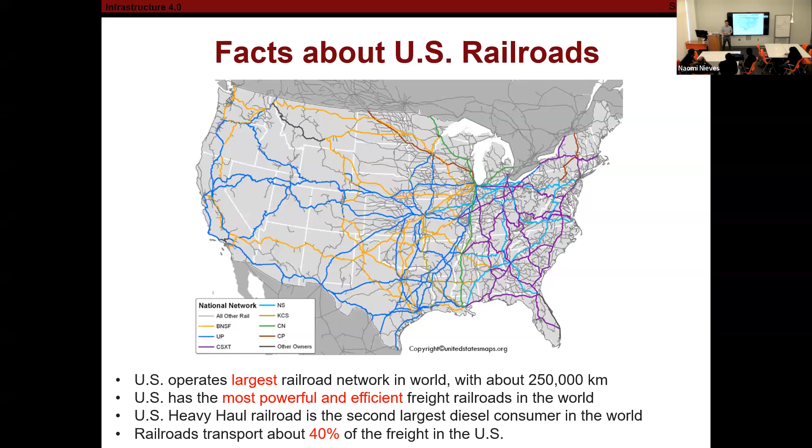So a little bit of basics. What is track? In your mind, probably the first image you have is this—yes, we are close to the stadium, of course. So what is track? A track is a guided way. It's guided—you cannot cross to a different way, you have to stay on your track. Similarly, we have the railroad track. It's a guided way; we do not maneuver the direction, the only way to control is the speed along the track.

In case you missed the news, there was an accident in Ohio in February. This is the kind of attention we have to give to the railroad—it's actually related with our life, very important, related with safety, efficiency, and transportation costs. So it's an important system; we have to inspect it and make sure it can operate safely.

So we have to do a lot of regular inspections. FRA actually requires each track segment to be inspected at least twice every week—very frequent compared with the size of the network. A lot of traditional ways: we use rulers to measure the gauge, check whether the bolts are well maintained, sometimes check switch points and crossings, and we also have hand push cars to measure different components of the track.

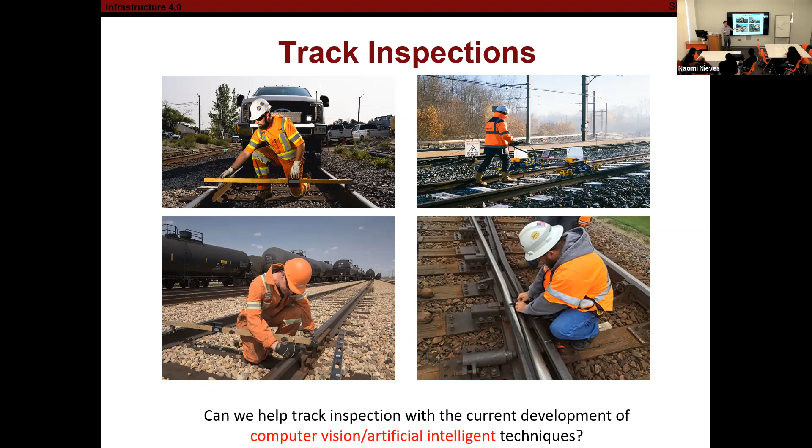Another hot technology recently is computer vision, which you've probably already heard about since you guys are working on autonomous vehicles. We want to make this technology work for different disciplines, so why not make it work for railroad inspections?

Would that be helpful or not?

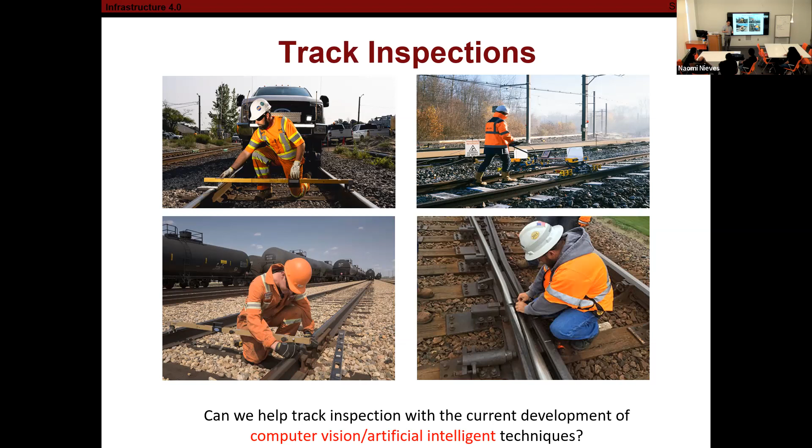What is the definition of computer vision? You may have your own definition, but according to Wikipedia, the most cited source, this is the definition. A lot of definitions on that website may not be the truth, but this one they actually copied from IBM's definition. Basically, it tells us we try to mimic the way our human brain processes the image we get—how we get the image from our eyes and how our brain processes it.

So if we see something, we will know something. If we can let the computer see something, we hopefully can let the computer know something. That's the idea.

How many of you use a camera? Use a smartphone? Have you ever taken a selfie before? Everybody did, otherwise you don't belong to this generation. Whenever you take a selfie, you can see there's a box outlining your face—those are called a bounding box. This means the chip can actually know where our human face is.

If you try to fool the camera, you can draw a cat or a dog—it will not detect it because the model is not trained for that. So this tells us we cannot fool the camera. The camera actually knows which one is a human face and which one is not, even if they are similar.

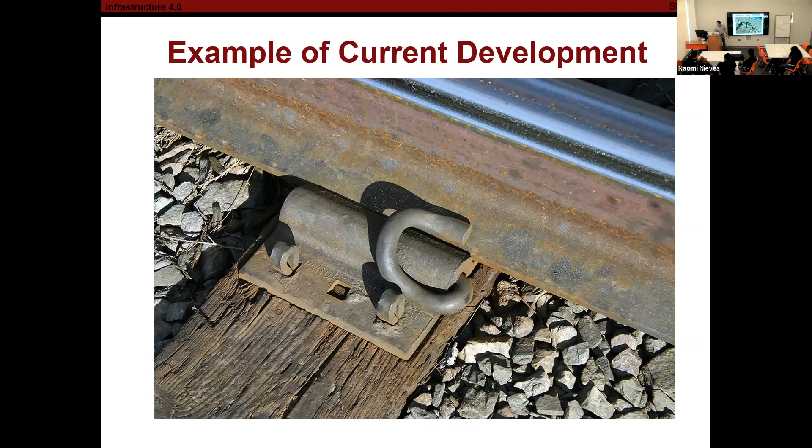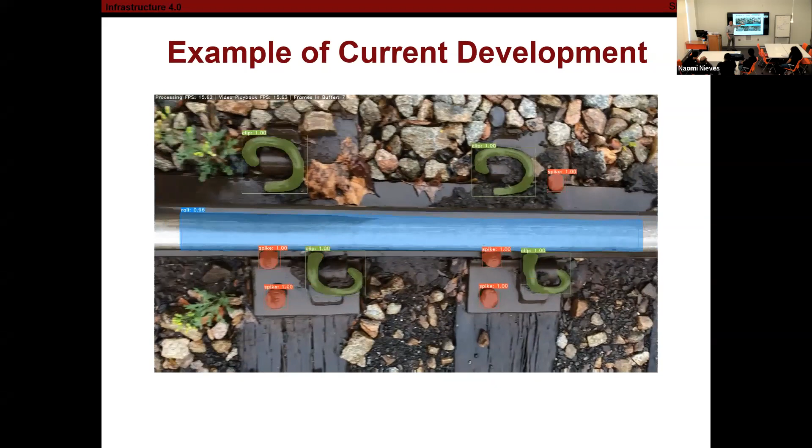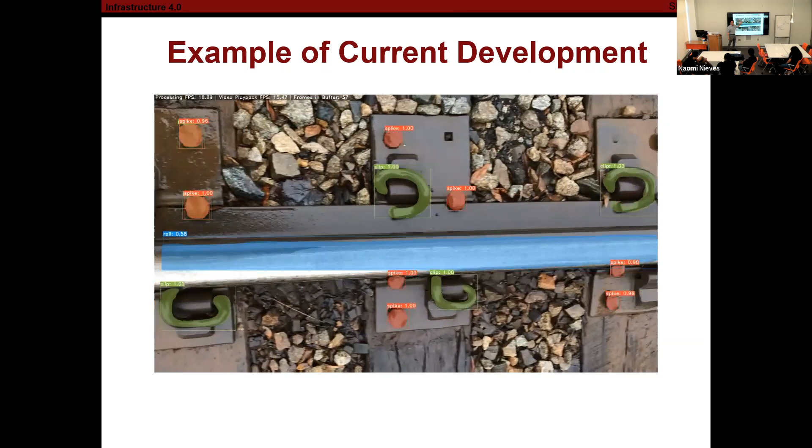This is a video where we process the images through a smartphone. You can see my student was walking along the track. Of course, you saw the images previously. Nobody's going to paint all the spikes red and clips green, there's a lot of paint. So basically, our computer vision model, when it receives the image, assigns a mask and outlines the contour of the component. That helps us know whether the component is missing, whether it's broken, and to what degree.

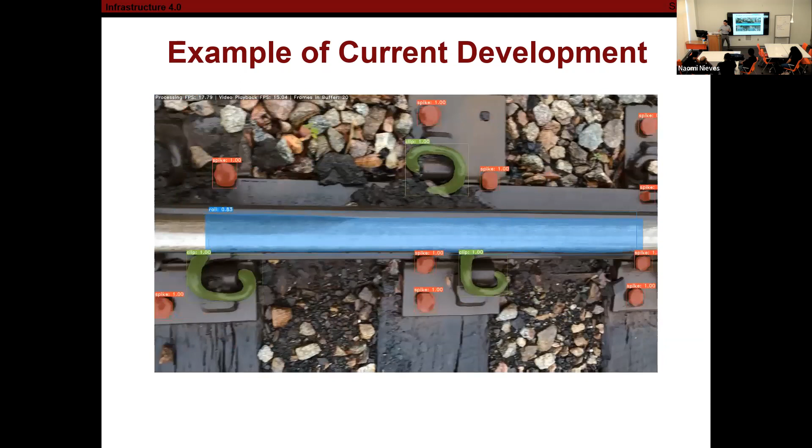Another contribution of this study is that it's the first time to reach 30 frames per second with a single GPU. What does that mean? Think about when you take a video with your smartphone, the typical frame rate is 30 frames, meaning we take 30 images per second. If our processing time is equal to or faster than that, we do not need to store any images at all. We don't need to waste storage space; we can directly process them and just record the information. This is why it's real time, and we're very proud of it.

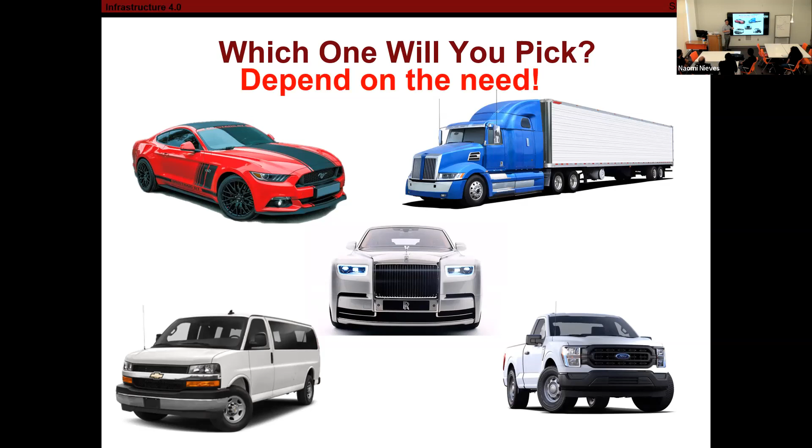Great taste. But in order to help us make a decision, we need to know why we are picking this car, what is the motivation? If you're going to buy a batch of mulch or sand, you probably won't pick the Rolls Royce, it would ruin the car. You'd probably pick a pickup truck. But if you try to haul a group of students to a conference, you probably won't pick a Mustang, you'd pick a van. It really depends on the purpose. When you think about picking something, it really depends on the need. If you want to race, yes, you'll pick the Mustang, and you can even customize it to better suit your need, with a better engine, better intake, better tires, you customize. This is actually exactly the way we do the development.

Okay, so we took the generalized model, and we find what is most suitable for our application need. Once we find that, we customize the model by revising it. If the model is not available, we start to develop our own architecture. So this is the philosophy behind it.

All right, so one example of this is the activation function. If you're familiar with computer vision models, activation function is a function to determine whether each specific neuron can be activated or not, whether it's needed to be activated or not. So we developed a hybrid activation function and compared it with other state-of-art activation functions.

In that case, when the neuron is needed, it will be activated. When the neuron is not needed, it does not need to be activated. So in this way, we can do two things: one is to save computational resources, and the second is, if we have insufficient computational resource, it will accelerate inference speed.

So if you still remember, previously we reached 30 frames per second. This is the second generation model we have, based on our YOLO-V4 hybrid activation function. It can reach almost 80 frames per second, which means if we have a camera that can take 80 pictures per second, we can process it without storing any particular frame. The rest are different state-of-art models back to the time we published it. Nowadays we have YOLO-V5, V6, V7.

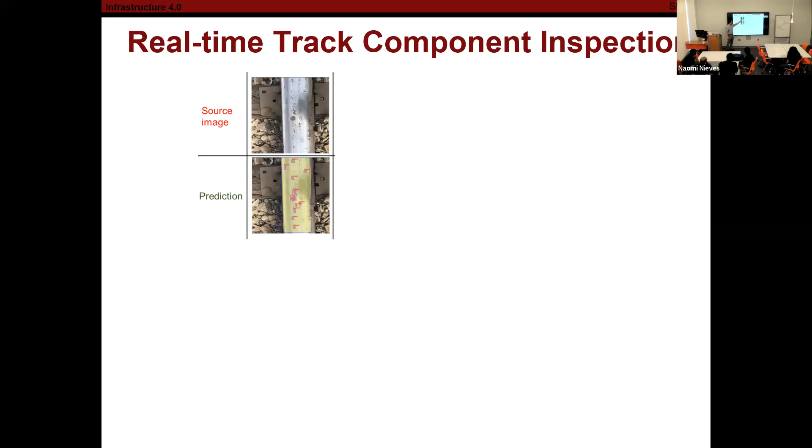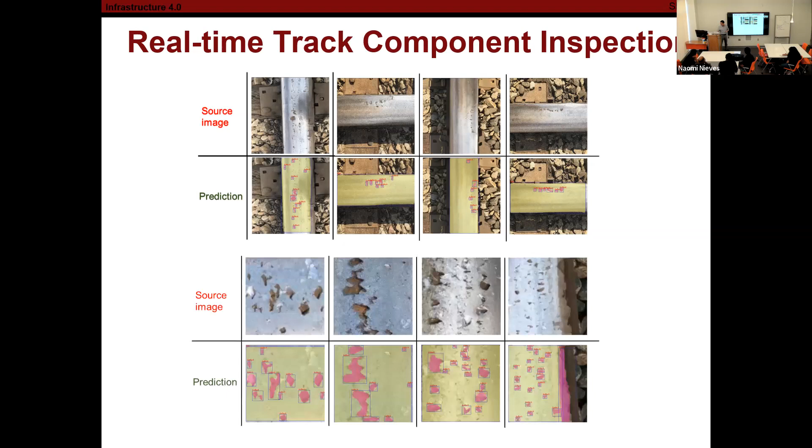We did extra work on the rail surface defect. You can see a lot of rails have those surface defects. It really depends on how big it is and what percentage of the area is affected. We developed another model that can focus not only on this direction, but any arbitrary direction, to locate where the defect is and what the area is. If it is significantly big, we can also outline the contour of that shape. Now we can do a summation of all the defect areas and compare with the total rail surface area. That is an indicator of how good the quality of the running surface is, and it helps the railway manage when to do the surface resurfacing.

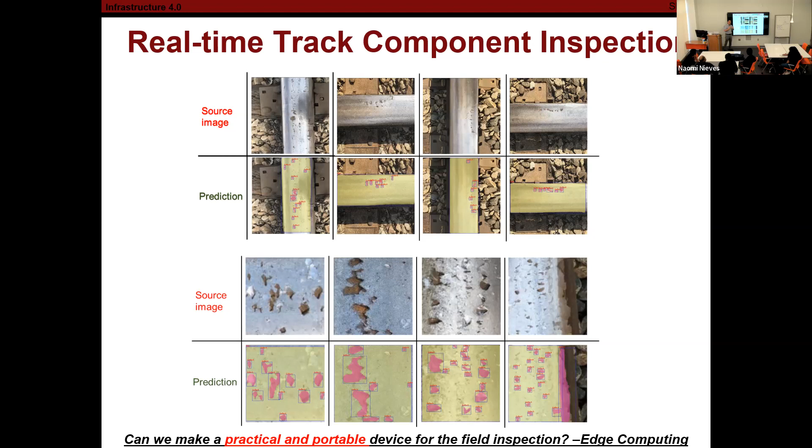We got a question from FRA. Previous development is good, but how can we make it more practical? Can we develop a real system that is deployable? That's the question. Let's have a try. So how can we do that?

So we start to train different models. Then we realize maybe for field deployment, we do not need something sophisticated. Because if a model is able to detect a lot of general things, when we use that model to detect a specific thing, we are wasting the capability of that model. We want each model to be very small and very specialized. It doesn't need to do any other things. Similarly, we train a trainee for a specialized job. In that case, we can reduce the model size and the parameters we need for computation.

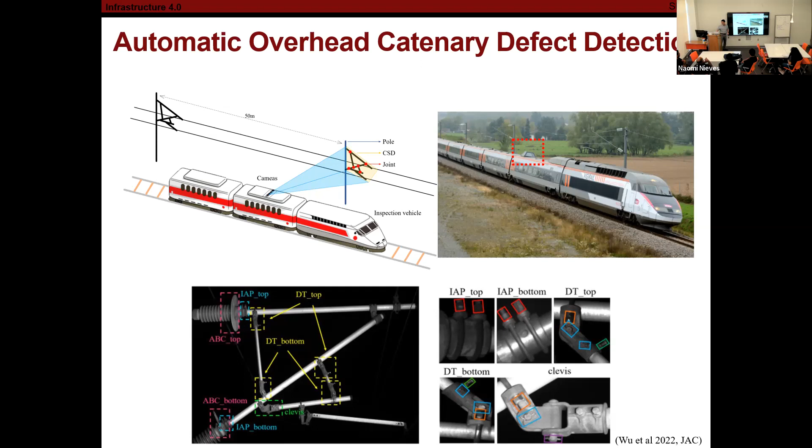So our development is to make our bounding box also be able to rotate, to accommodate the component itself. So we developed a rotational detector. Depending on the component of interest, we can change our detector's orientation. In that case, we can detect the component more accurately. So anything else? Anything else you think that will happen?

We have fixed camera, we have fixed component. Then we started to talk about a fixed camera, and the component can be at arbitrary orientation. What about if our camera is moving? That is also possible, right?

Okay, what about the camera is moving? So when would the camera move? If you can think about a real application scenario... maybe the camera screw is loose, yeah.

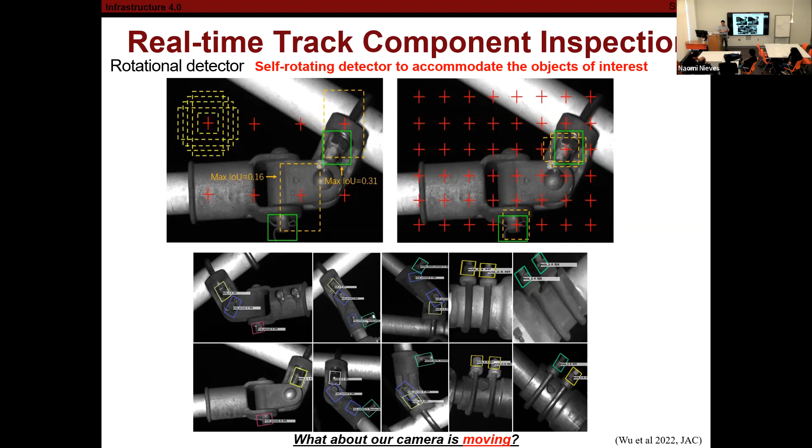Weathering, especially when it's windy. When we use a UAV, it can never guarantee your camera is always at a fixed height and fixed angle to look at the track, especially when trying to accommodate different wind from any arbitrary orientation.

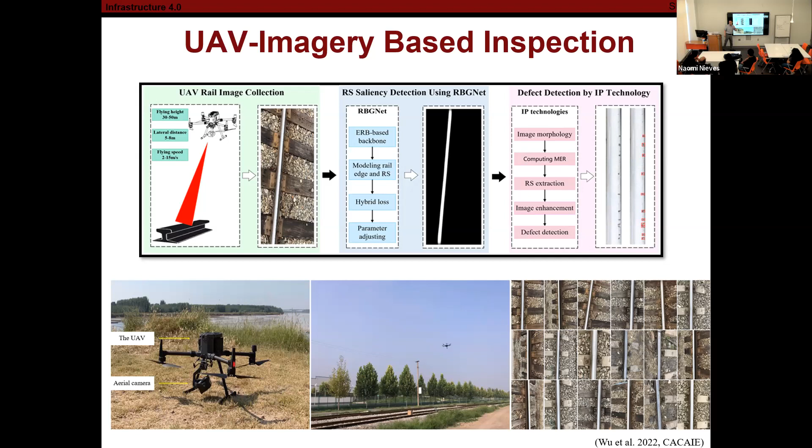So we made a try, and you can see the images we collected from the Columbia area. They all have different heights, different focus, different angles. You can see they take different height, different focus, and different clearance—sometimes it's a bit off to the left, sometimes a bit off to the right.

So why we want to do this is because when we have very good segmentation of the rail, it can actually guide UAVs. It's a perfect guideway. If we can guide it, we can develop an autonomous UAV system, and just like a train follows the track, the UAV can also follow the track through autonomous inspection.

I need to thank my collaborators at the mechanical department from the University of South Carolina. We started with this. Of course, we couldn't afford a very expensive UAV at the beginning, so instead we developed a ground robot and let it follow the terrain.

We try to see whether the robot and algorithm is able to do that, and if so, we can transfer the algorithm to the UAV system. All the components were purchased from Amazon, and the battery power—you can do the same thing.

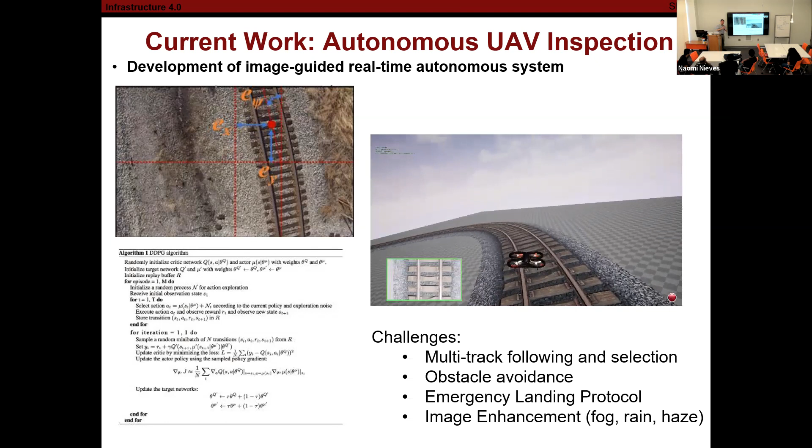Any questions so far? Good, I want to make sure you guys are good.

All right, let's move to the last part. So far we've been talking about how we can improve railway track safety through better inspection. So what about the community part? Can we do something good to connect the railway infrastructure to the community? Can we serve the community?

We all know railroads are very helpful—they transport a large amount of freight. That's the reason you get your Amazon Prime so cheap. That's why freight is cheaper, because it's more efficient.

But sometimes it can be very frustrating for commuters. Imagine you're going to be late for school and you're stopped by a crossing like this. You have to wait there—no matter what you do, there's no other way. So think about being frustrated by this situation.

What about first responders getting stopped by a crossing? Then the situation could escalate very quickly, because when they're responding to an emergency, every second counts. So we asked ourselves, can we do anything about that?

What is wrong with the current system? What improvement is needed? There are a lot of stories you can search for—a police car having to find another route, a firefighter having to throw stuff over the train, a medic having to throw medicine over the train. There are a lot of these stories.

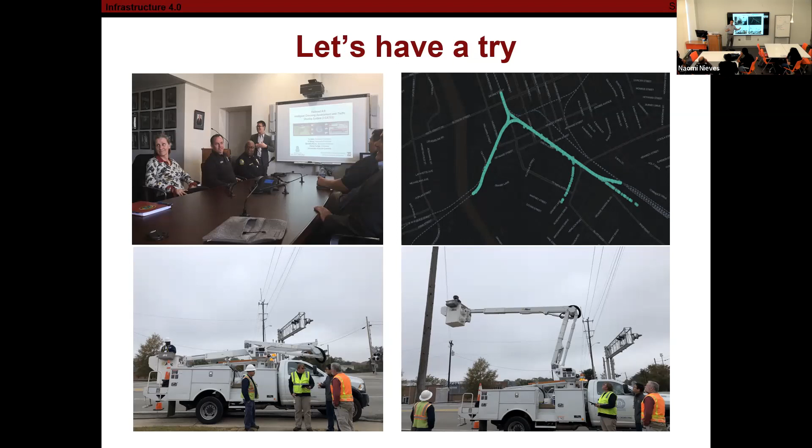So we tried this before the pandemic. We did install a system along one of the most problematic crossings, rated by the first responders from the City of Columbia. We modeled that crossing, which is along Assembly Street. This is where we installed our system to monitor that crossing.

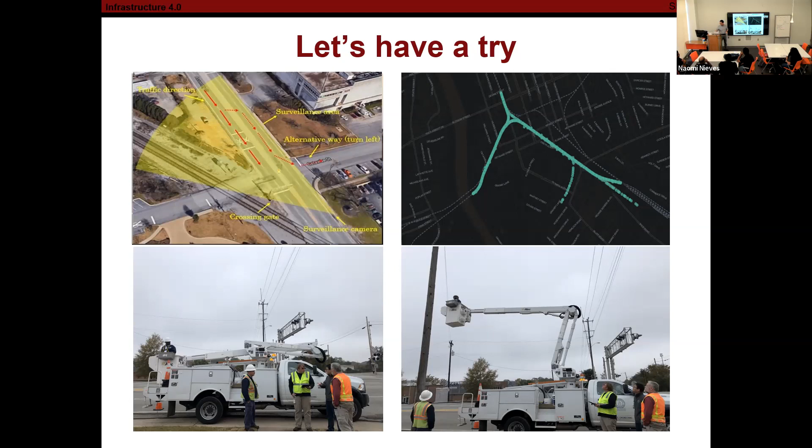So we monitor both the surface traffic and also the railroad. The two combined will give the estimated decongestion time. So this is the result from the surface street traffic monitoring.

We do have certain patterns for the traffic to be accumulated and dispersed. If unfortunately you are stuck in the traffic, you have to wait until the front traffic gets clear until you can pass the crossing, plus the railway occupation time, which means starting from when the train is in the crossing to when it departs, so the gate comes down, then the gate opens up. That total time will be the estimated delay time.

Even if you are the first responders, you have to wait that long in front of the crossing. So this is how the system looks like.

So we integrated with Google Maps. We are fortunate to have CSX as our partner, so they share with us their train dispatch information. So we can use that and the GPS location and train speed to calculate for a certain crossing when is the expected arriving time of that train, when is the expected departure time of that train. So between this time period, this crossing will be blocked.

So if you're familiar with the traffic management system, this is a dead link between that period, and then it will be reopened again once that time passes. So during that period, if we have a first responder unit that needs to be dispatched, we don't use that link to get the route.

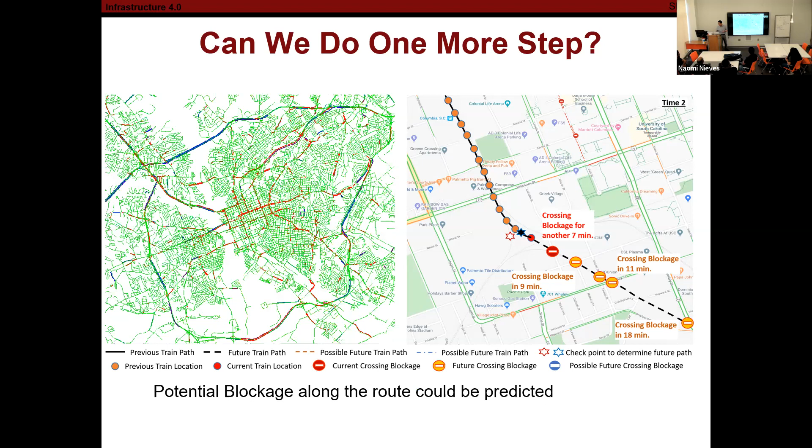Then we propose new different branches. This is the current dispatching schematic. Basically, if the 911 dispatching center receives a phone call, they would determine where the nearest unit is and send it there. If unfortunately that unit gets blocked by a railroad, they report back to the 911 dispatching center. The dispatching center will target the second nearest station and send the second unit. If unfortunately the second unit also gets blocked, they call back the dispatching center for the third unit.

If we already consider the potential blockage of different crossings, they will actually know the confidence levels of the different units they dispatch.

Then they can minimize the expected time they would use. Not necessarily send the unit near the station, but maybe send the unit with the highest confidence, the shortest time to arrive at the situation. This is what we proposed.

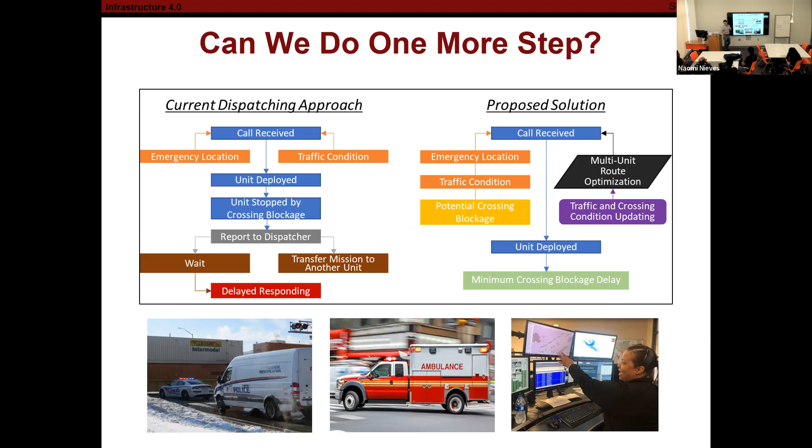And we did a case study in Columbia. So basically, we assume there's an emergency at a random location near the USC area. We have different fire stations, and according to the distance, we have certain priorities. This is based on the current dispatch system, but we can have different scenarios. Let's give you some examples.

So at this particular timetable shared by CSX, we do have two trains passing through the city simultaneously, and the different trains will block different streets at the same time. Those are the different potential blockage links. The first responder would need those important crossings to pass and reach the destination. Those are the potential blockages the first responders may encounter.

For example, this particular crossing will be blocked from 9:03 to 9:41, almost 40 minutes. So if the first responder is blocked there, there's nothing they can do.

Based on the case study, this paper will be published very soon, and I can share more details with you. So by considering the potential blockage, we will actually help the first responder dispatch system save a considerable amount of time. Again, in an emergency situation, every second counts. Any questions?

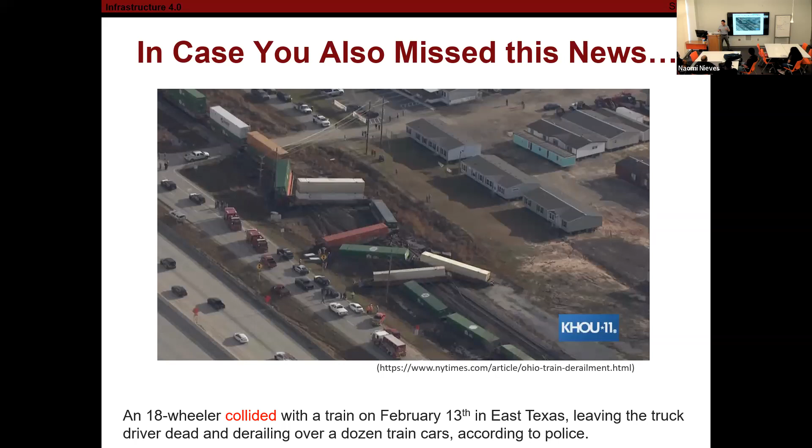Let's give you another example. This vehicle also got stuck at the crossing. It was too late for the train to stop, so it crashed. That is probably one of the reasons some of your Amazon Prime boxes get delayed.

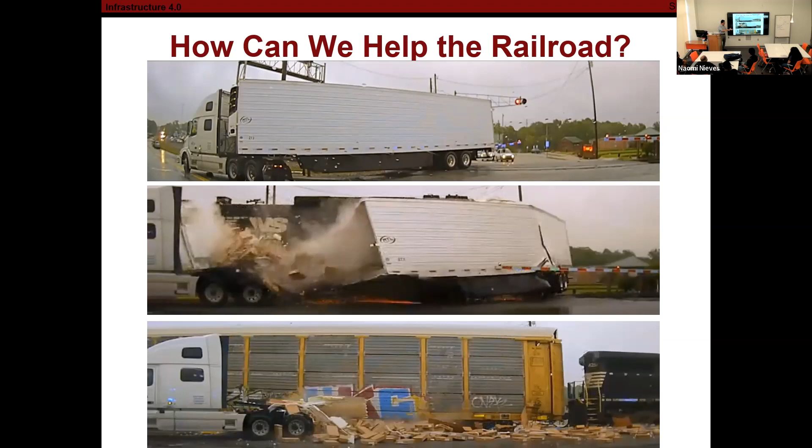Those are all Amazon Prime boxes, so don't blame the driver sometimes. We don't want something like this to happen, right? We want to save the life of the driver, and we want all your boxes to arrive at your door.

Meanwhile, we also want to help pedestrians. If they try to commit some suicidal behavior or anomalous behavior, we try to send somebody there to help. So we can further enhance our system to detect both pedestrians and any unwanted object stuck in the crossing. Basically, when you share the information back to the railroad, is the crossing okay to cross? If there's any unwanted object, we send somebody to go there and check it, or clear the situation.

So this is the model we developed, just using foreground and background checks. I'll show you a video later.

So this uses technology of foreground detection and background detection and foreground segmentation. If there's any object that does not belong to the background information, it will be cropped out. Also, depending on the staying time, the heat map will be accumulated. The more reddish color indicates a higher risk, but if an object is passing the crossing at normal speed, that will not be accumulated. This helps us raise different flags to alert different responding parties.

So you're developing the heat map based on risks, right? I determine the risk; we are not determining the heat map based on the risk. Is the heat map helping us classify the risk? The heat map is developed based on how long the object is within the monitored area. The higher the duration, the higher the risk factor. Yes, that's how you're measuring the risk.

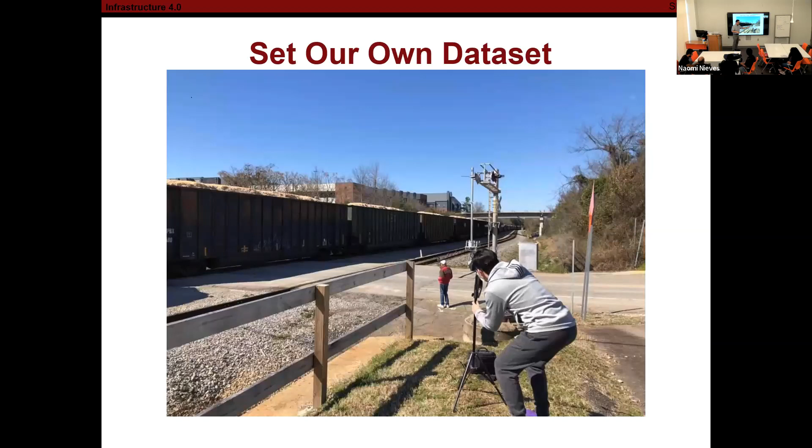So this is one model we have. The other model is we try to collaborate with psychology and motion sensing experts, so we can assign different components to each individual and then trace the key point movement to analyze the behavior of the individuals. By doing that, we do not have the data set for that, so we have to create our own data set, and of course we did it in a safe manner.

We do have students who watch for the trains, so we let the student just act like crazy - sometimes they lay down on the track, sometimes standing up within the crossing. Of course, when there's no train, we need to do it safely. We create the training data set and train our model.

So you can see we can allocate the different key points to each individual, and from that motion pattern we analyze how they behave. Let's give you an example.

If a person is approaching the crossing and crossing it, that's normal behavior. But if this individual is spending substantial time, the anomaly score will increase. If they are staying there and even lower their center of gravity, which indicates sitting or laying down, the anomaly score is very high. Then when they stand up again and leave the area, the anomaly score will be low. Based on the anomaly score and the time duration, we can predict the associated risk. Of course, we don't have a very good way to quantify the risk, but at least it gives us the different levels.

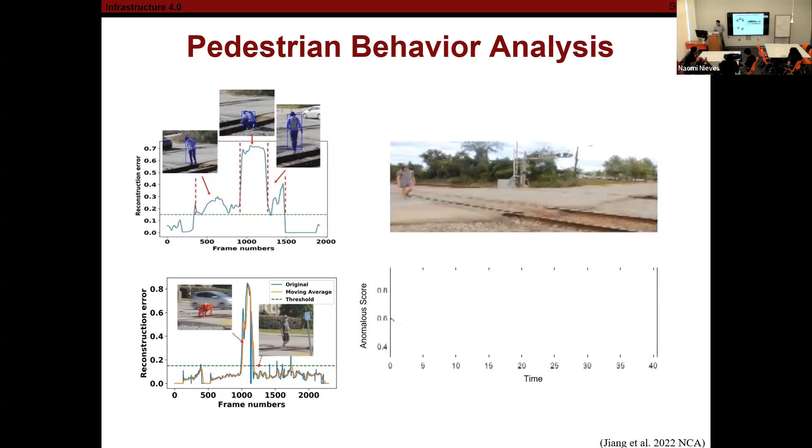Warning, warning, you are staying at the dangerous area. Please leave right now. Advertencia, advertencia, te estás quedando en la zona peligrosa, por favor vete ahora mismo. Warning, warning, you are walking along the rail track. Please leave right now. Advertencia, advertencia.

If you pay close attention, you notice a different alarm, right? If the person is standing there, it's a different alarm; if the person is walking along the track, it's a different alarm. But if this person starts to cross the track, there's no alarm. We got help from some experts in psychology, who told us that if you broadcast the same message, nobody thinks you're talking to them, but if you broadcast different messages, they feel they are being monitored and then they will behave.

So you got that from the psychology faculty, but did you do any testing on what is more effective, or is it just opinion? Not yet - we just developed this system based on the advice and opinion from our friends. We are going to test this system in Florida on Brightline's track, because they have a relatively high record of trespassing issues.